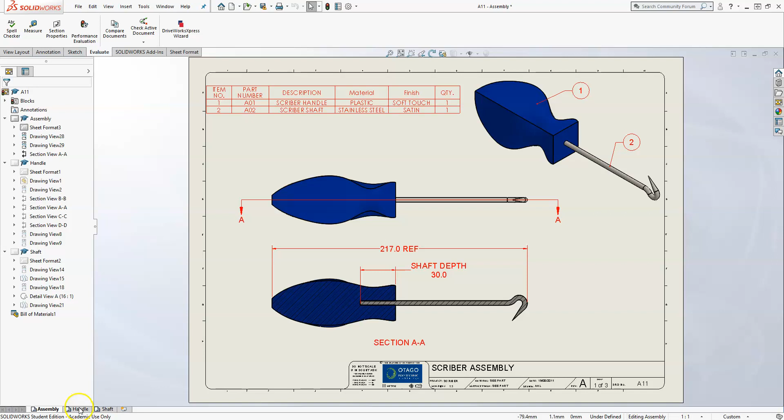This is working through the Scriber, which consists of two parts: a handle, which is on sheet 2, and this will be a loft with a hole, and then a shaft.

Let's start out with the actual shaft. If we look here in isometric, it's a cylindrical thing that looks like a hook, and then it goes to basically a point.

So we've been learning about sweeps and lofts. What we'll do is a circular sweep, circular profile, along this path to this point. Then we'll use this end surface here as a circle, and loft that circle to a point, which is right here at the end.

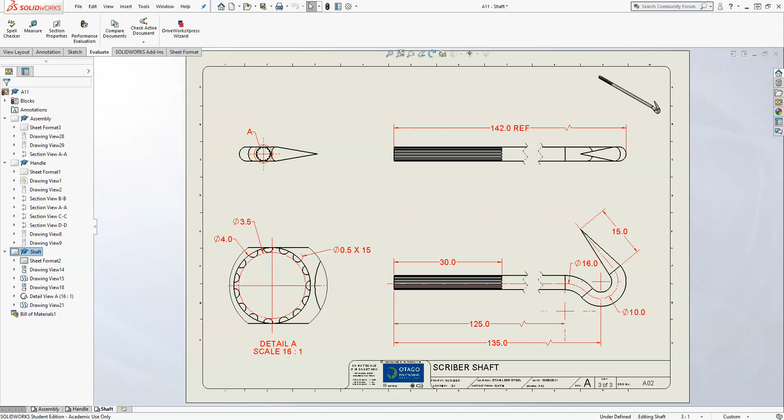So that's what will get us our point. If we look at our other end, we have basically a series of notches around, 15 of them at a diameter of 0.5. And if we look at how things are dimensioned, it looks like this cut is tangent to a 3.5 millimeter diameter circle, whereas the outer dimension of our shaft is 4. So let's dig into that.

We'll start out - we need a path and a profile. I'm actually going to start with a profile. So I'll draw a circle and dimension it to 4, because that's the size of that shaft, and I'm on the right plane. Again, I need to be fully defined.

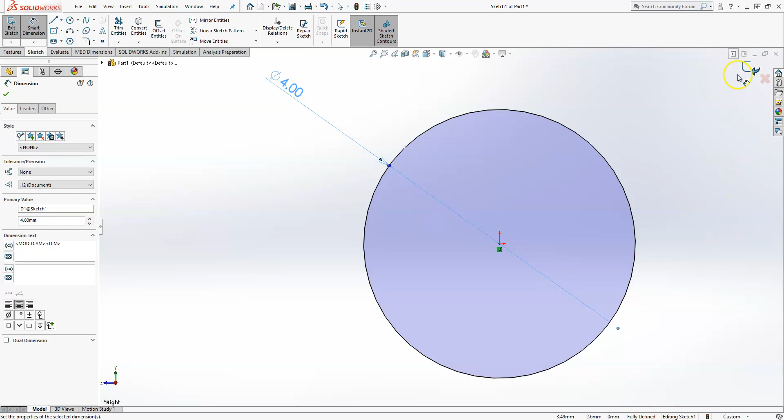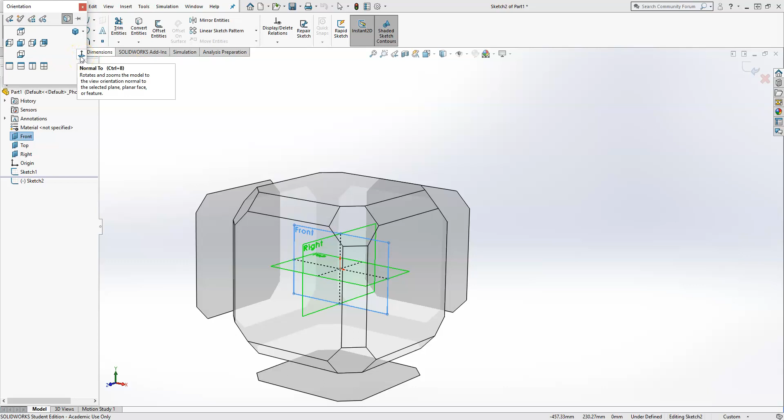We'll quickly look at our planes. Now what I'm going to do is on our front plane, sketch that shape of the actual scriber. Again, the space bar gets me to the orientation, and we go Normal To. I'll now turn my planes back off, so I know where I am with my origin.

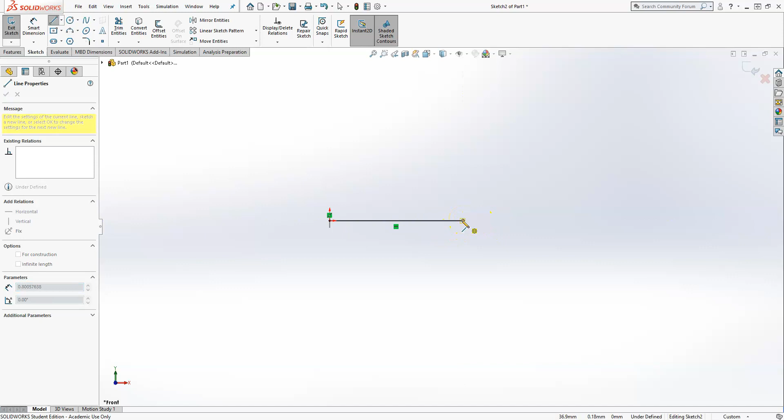So now we'll draw a line - an arc and then another arc, basically. So that is our basic shape.

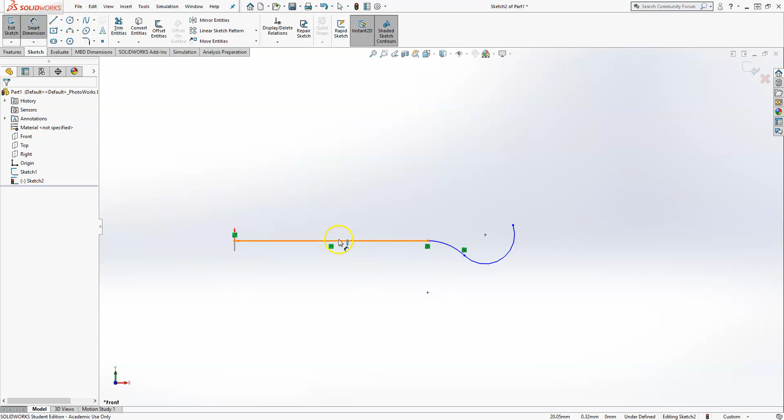Now let's go ahead and add our dimensions. We know from the drawing that this length is 125. Because everything is scaled, typing the F key will get us to fit our sketch to the screen.

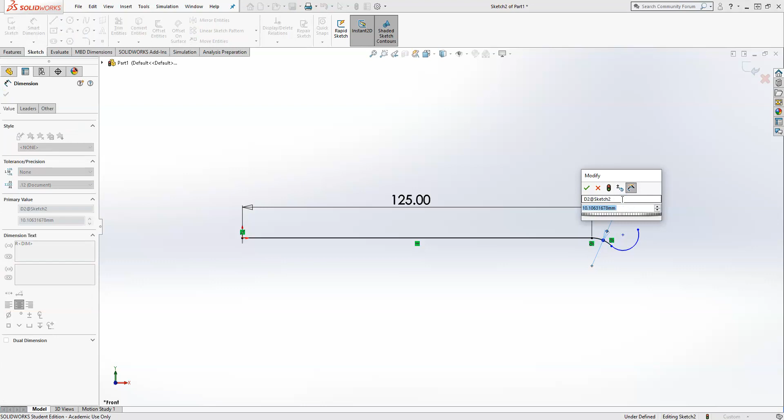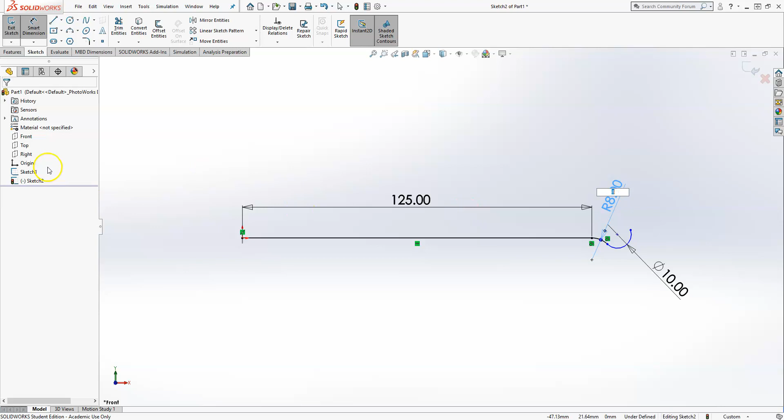So now, the diameter is called out on the drawing, so we have a radius. We'll put an 8 there, and then we have a diameter here again. And if you want to change from a diameter to a radius, we go into the leader, and you can go back and select your old dimension and get those actual diameters in there.

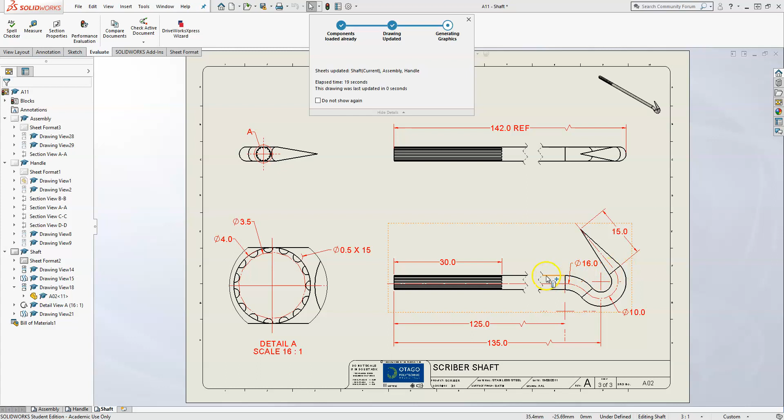So we have 10 and 16. If we look at the drawing, it doesn't look like our center point is aligned with our center line there. But what it looks like is that this side of our arc and this side are actually straight through the center point.

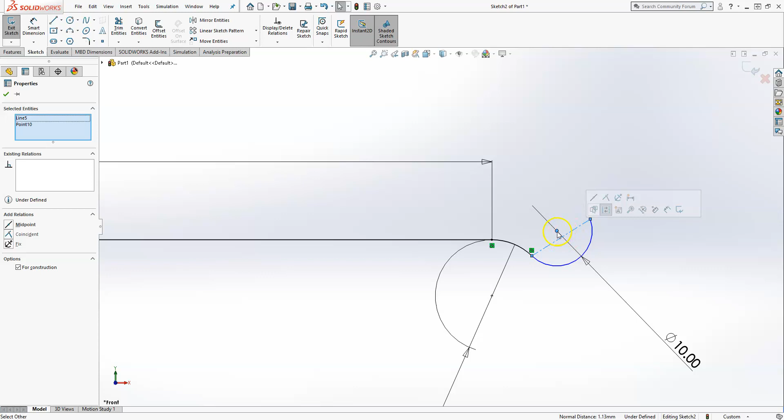So let's see how we can do that. Basically, I'm going to add a center line in here and connect those 2 points, and then I want to put the center of that arc and that line - control selecting the line and the center of the arc - and we're just going to make those coincident.

That should get us that information, and now we have one last dimension. We're not fully defined yet because we don't know where in space, and we have that other dimension that is the 135. So now we have a fully defined sketch, and we'll accept that.

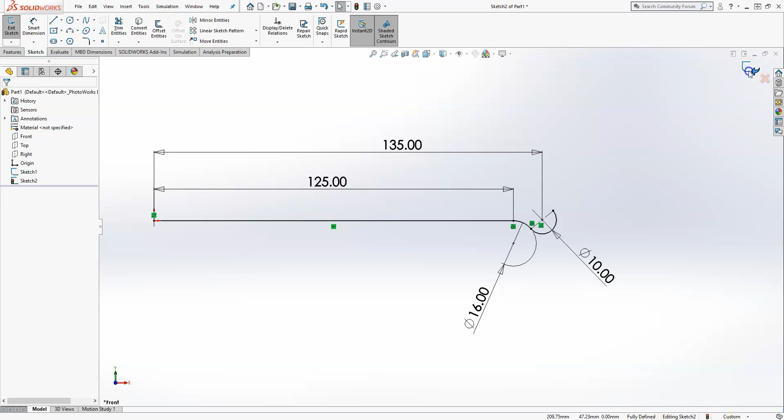So now we have our profile and our path. If we control select both of them and then go over to that swept boss, it's already in there. You can click OK.

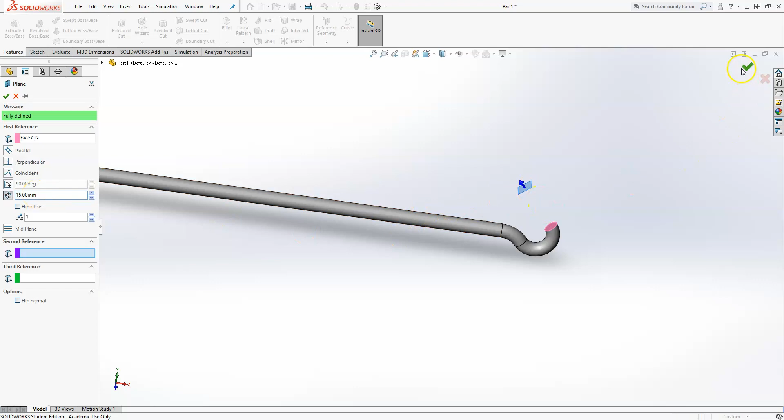Now I want to create this loft where I'm going from this shape to a point. The first thing I want to do is create a plane offset from this surface. By clicking on that face, I can type in the offset, which according to the drawing is 15. Now that we have a plane, we're going to create a sketch on it.

I select the plane, go to sketch, and now I want to go normal to. This is kind of an unusual sketch because we're normal to the face, which isn't necessarily normal to the actual geometry.

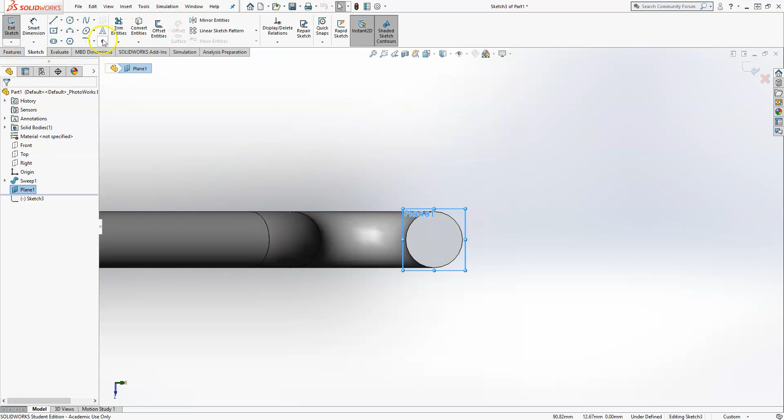What I want to do is just create a point in the sketch, and then if I control select the point and the circle, I can make them concentric. So that concentric point is what we will loft to.

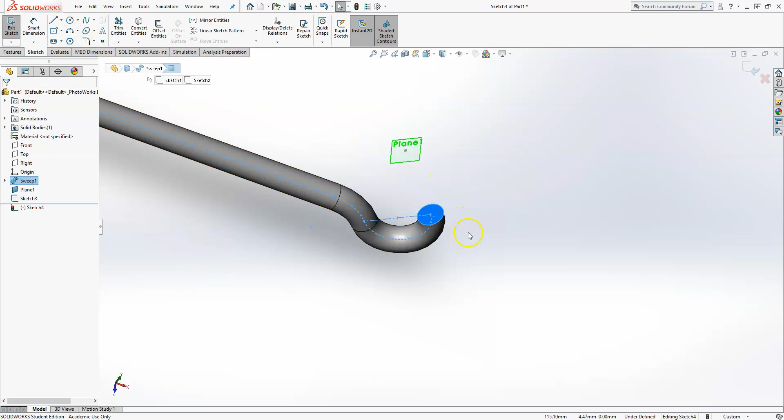For my loft, I need two sketches. Again, I'm sketching on this surface, and I just use convert entities, pulling in that profile from the surface. So now I have two sketches: the circle, and the point that's the specified distance away.

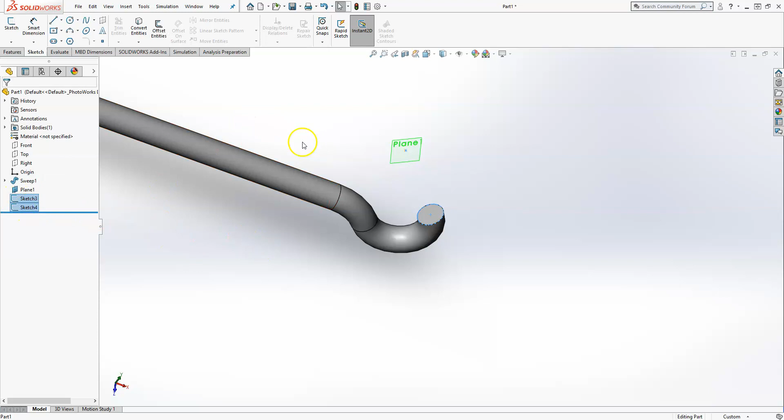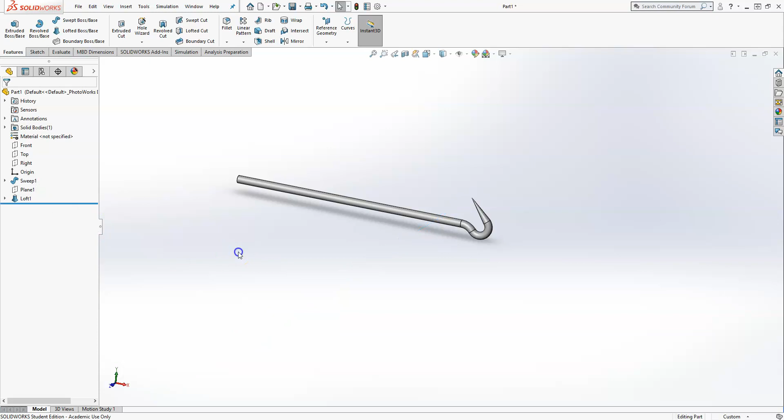If I control select both of them and do a lofted base, I have my point on it. This plane is kind of big and ugly now, so I can just go ahead and quickly hide that. Make sure you're saving as you go.

Now what we want to do is draw one of those cuts on this back end, so let's go ahead and sketch. We want to create one cut as a feature and then pattern the feature, not pattern the sketch, but pattern the feature.

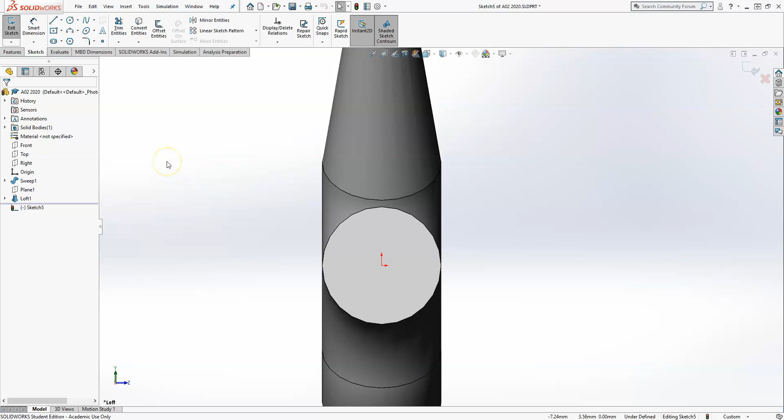I'm going to start out with drawing a circle of that 3.5 diameter, and then I'm going to change that to a center line. Just by clicking on it, I can make it construction geometry, which helps me identify exactly where to draw a circle that is 0.5 diameter.

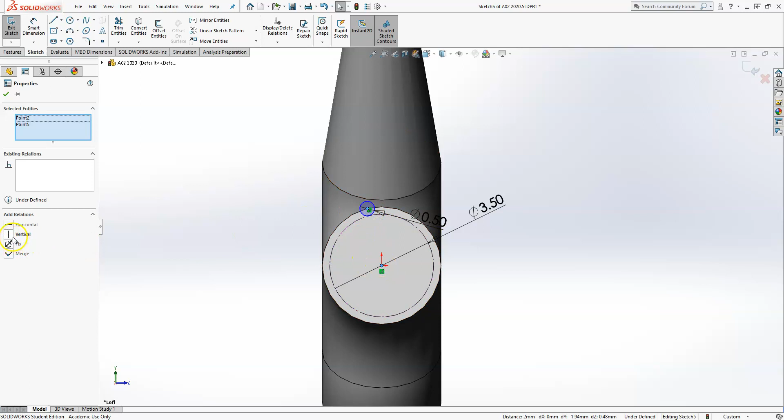Now what I want to do is make that tangent. I can control select both those circles and make them tangent, which puts that circle on. Now I want to make those center points vertical by control selecting those two center points. That looks pretty good.

I want to make sure I'm fully defined, and then I cut that 30 deep.

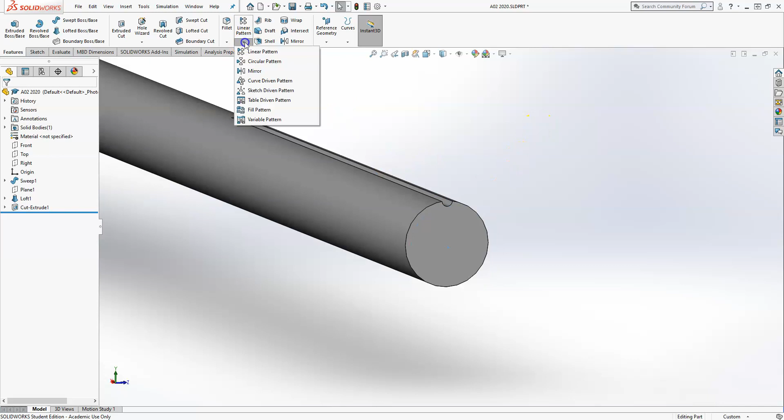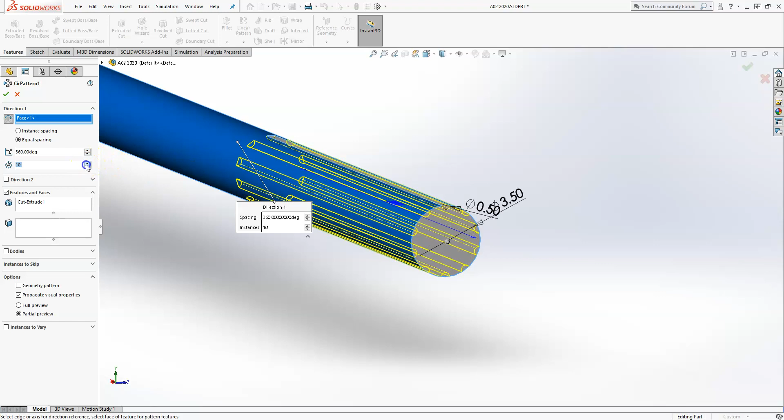We're good. Now I can do a circular pattern. Sometimes it's easier to select what you want to pattern first and then go do the circular pattern. So now my feature's in there, and it's asking me for a pattern axis. I can choose that round shaft and it'll pattern it right around that. We wanted 10 according to the drawing.

That's just a feature that looks like it'll help hold on that handle. Go ahead and save, and there we have a 4 feature scriber handle.

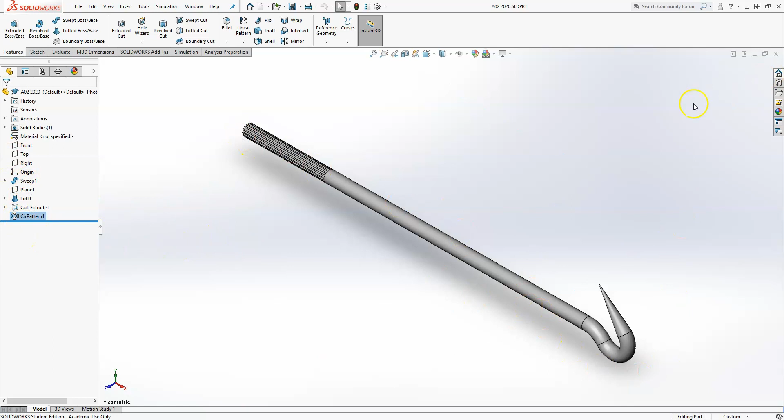Let's start a new part, and we will turn on our planes. Let's look quickly at what we're drawing here. This drawing is made purely from producing it in SolidWorks, not a perfectly crafted drawing for actually getting made.

What I'm showing here is we basically have 1, 2, 3, 4, 5, 6 profiles, and we're going to loft them. Our first profile is a square, our second profile is another square, and both those squares are 30 by 30. Then the next one is a 27 diameter circle. Then we go to a 35 by 35, then a 33 by 33, and then an 8 by 8.

We will create each one of these profiles on a plane, starting from our base plane, and then going 5, 20, 40, 80, and 105. So we have to make all these planes, 5 more planes off of one of our reference planes at these distances, and then we draw these simple sketches.

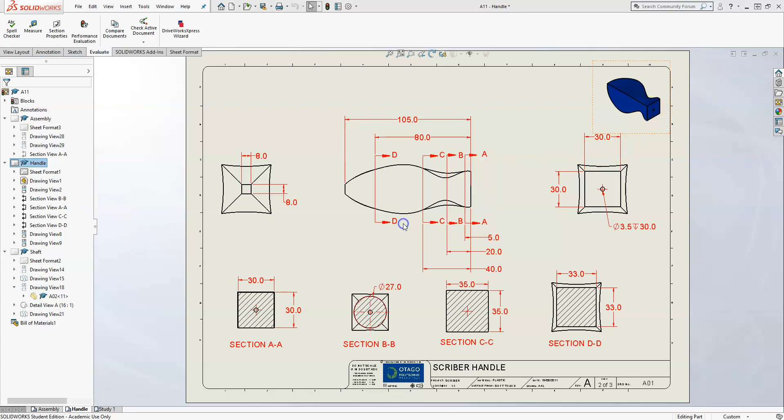So let's go ahead and do that. So we have a new part, and let's try and actually replicate it exactly like it is here. So we're going to start our sketch on this right plane.

Again, to make planes, we go into the plane on features. Our first reference point is that plane, and we're going to flip that so it goes the opposite way, and that first plane is 5 off the first. Then we'll select that plane again, that right plane to start, because everything is referenced off of it. So let's do 20.

And we'll accept that one off that right plane again. Now we're going 40.

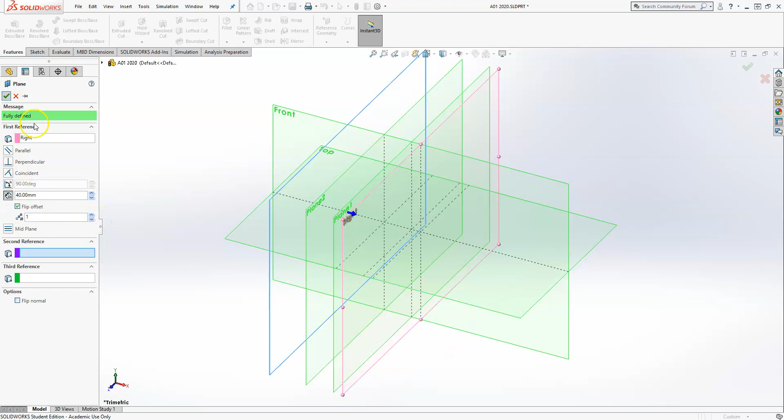Again, if you can, always try and use the same references that the drawing is using so that you are going in the same way, and those dimensions in the drawing should be consistent with how you want the actual part to be made and also measured. So 105, and we need to flip that last one.

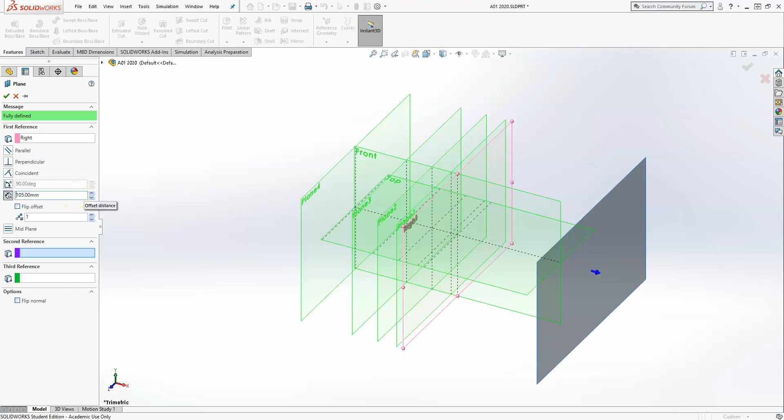So now we have all those planes. Now it's just a matter of putting each one of those different sketches on each plane. So what you should be doing is putting each one of those cross sections on each one of your planes.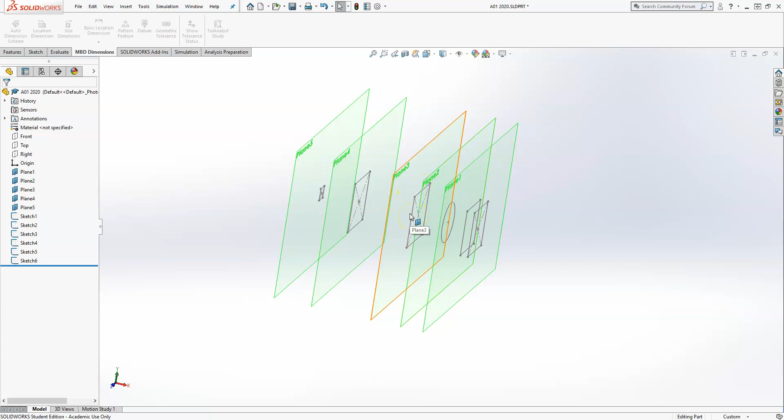So we have the square as the start, change to a circle, then slightly bigger, slightly smaller, and then ending up on that small 8 by 8 square at the very end of the handle.

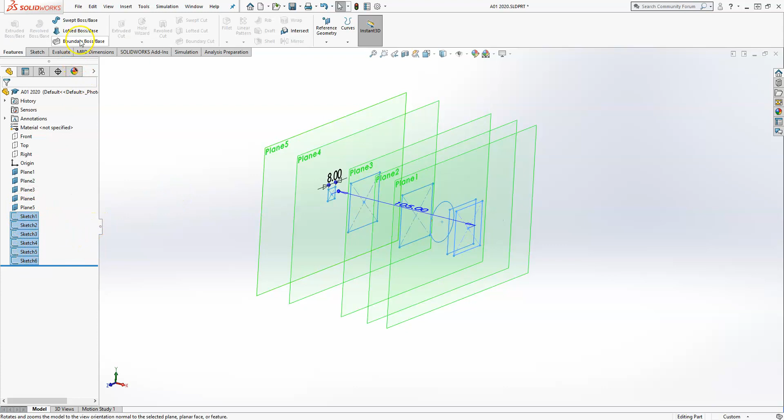So now what we would need to do is just create our loft. Let's select them all, shift select all of those in your feature tree, and then do your boss or your loft. What you'll notice is that things are kind of weird because we're not referencing the same points.

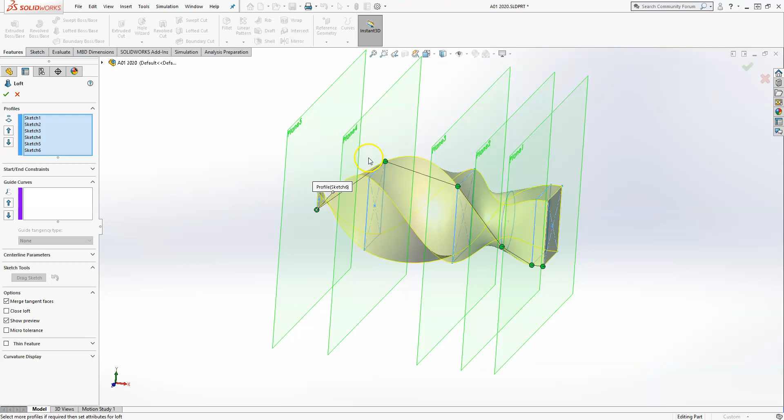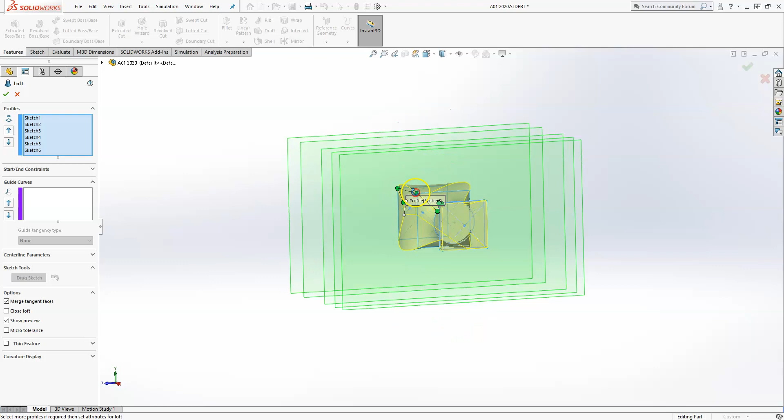So you want to be getting these points basically at the same starting point. And what that'll do, these are basically providing that curve. So once these are all basically the same corner of your rectangle and somewhere close in your circle, you will get that form that's created in that drawing.

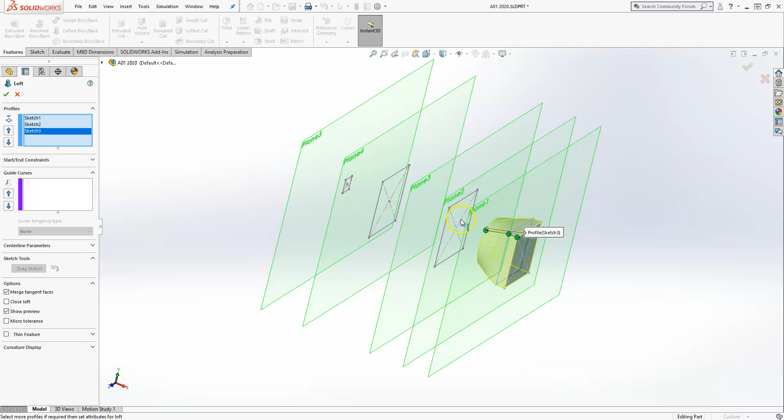So that's just lofting between those. We'll do it the other way, where we're selecting sketches, and the point at which you're selecting each sketch is where your green dot, your profile start, is. And that looks pretty good.

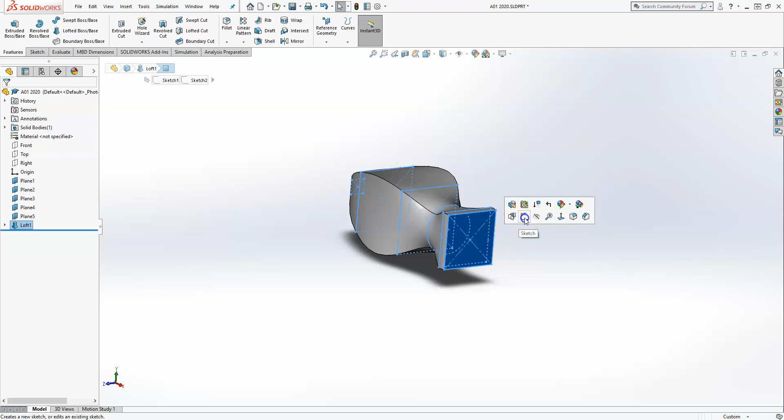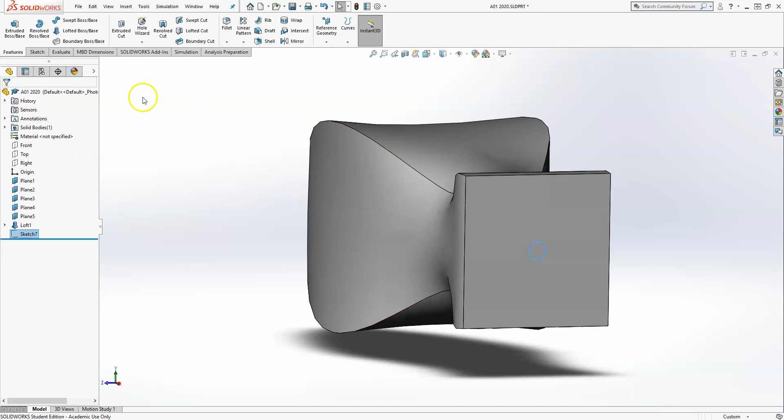So now you can turn off those other planes. Now the last thing to do is to just add that hole that we use as basically our reference for our shaft, and that hole is 3.5. You can use Hole Wizard if you want, but since it's just a simple hole, it's 3.5 by 30 deep.

So that's the handle. Go ahead and save, and we will now create this into an assembly.

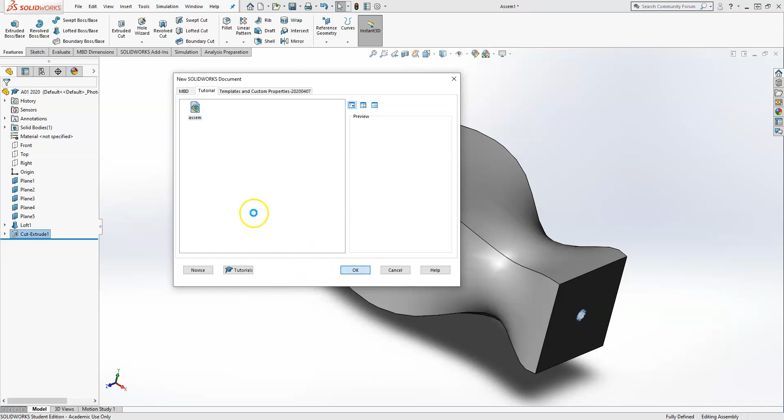So we open up our assembly, and we'll choose the handle as our fixed part. We'll put that in—so again, we're fixed. Now we want to insert a component; we want to insert that second part.

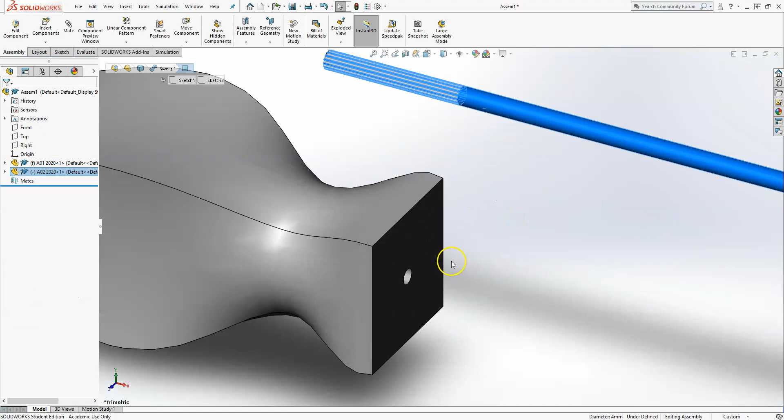All right, so now we select our shaft and we select our hole, and we'll mate them. That's a control select that we were doing, and we'll do concentric. I'm not choosing lock rotation because I want to actually orientate using the planes.

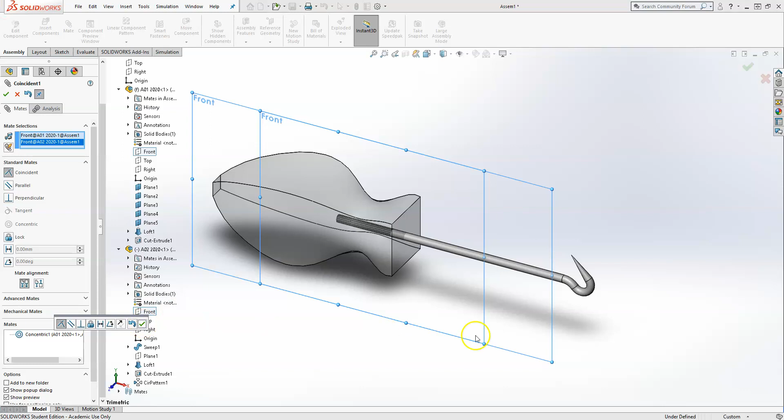So if we come in here, we can choose the front plane of our handle, and I want the front plane of my scribe to be the same. So we'll green tick that. Now it won't rotate, but it still can go in and out.

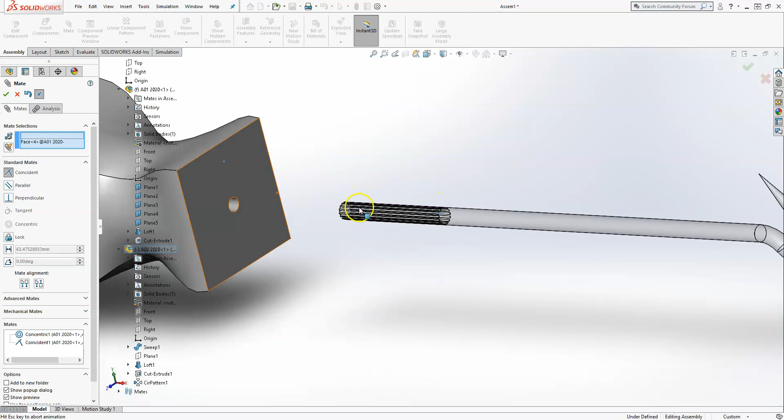So basically we can either select the bottom, or we'll select this face and this face. I want to be choosing faces over edges, and there you have it. So we've assembled that scribe. If we look, we're fixed with the F, and there's no minus sign, so we're fully defined.

So that's the loft and the sweep to make this kind of organic, funky handle and a very unusual scribe, but a sweep to a lofted point. Thank you.